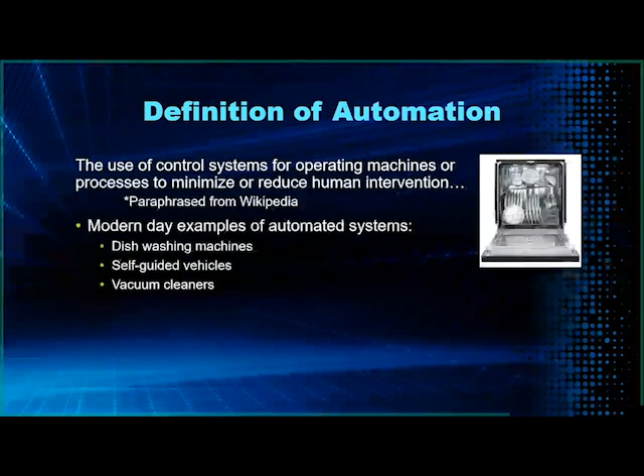So typically we think of automation as any task that is repetitive and a task that can be replaced with an automated device, whether it's a handling device or a software component. Some examples in our daily lives today could be the dishwasher, self-driving car, the automatic vacuum that runs around the house, scaring the pets and running down the stairs. So anyway, those are just some common examples to help you think about automation in a little different way.

So some of the trigger points that we commonly talk about relate to capacity, and this could mean trying to increase your current equipment utilization rate, also looking for ways to get more throughput through your system today without adding any additional resources.

We also want to discuss the importance of cost reduction. So this could be direct labor, it could be lost time, possibly relating to bad utilization or poor utilization of existing equipment. This could also relate pretty directly to quality enhancement, specifically having better process control, reducing scrap and waste.

Also very common in discussions over the last couple of years is the shortage of skilled labor. So how do we attack that specific element by using a little different approach? And also competitive positioning. So as you're quoting today, as you're marketing your business today, what are the salient points of your business? We want to look at automation relating to your ability to compete in the marketplace today.

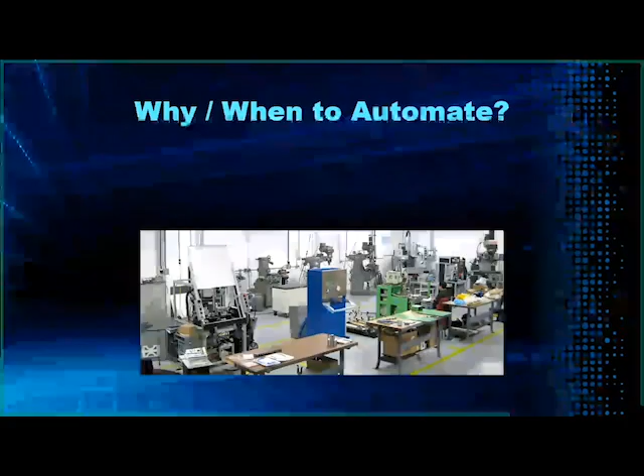So another thing that we like to look at when we're visiting with clients is we want to help them think about how they utilize their floor space today. It's a very, very valuable commodity that you possess - your shop floor, your capital equipment, your people. So are you using that space effectively today? How many machines currently sit idle during a shift?

Many of you recognize this particular picture as a traditional shop. This is similar to one that I grew up in. So you had a lot of machines sitting around waiting for an operator to bring work to it. So this is not too common anymore, but something that's interesting to look back at.

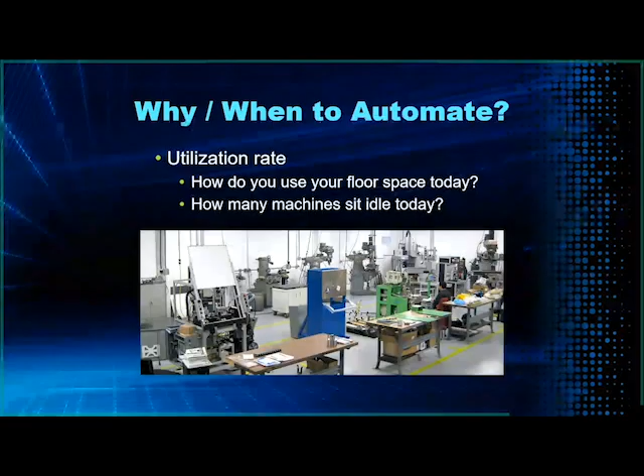How do you apply your labor today? It's not common, especially in North America, Canada, Mexico, to have an operator for every machine. We typically cannot bear that type of operator cost per machine. This isn't a typical model, but it's an example that triggers the thought: how am I utilizing my labor today?

We like to examine utilization rate and look at the percentage of time the machine is in cut compared to when it's not. You can break the non-cut time down by two factors: in cycle, where it may be traveling from one part to the next or to a tool change position and back, or the machine sitting waiting for work, or an operator setting a part up using the machine spindle.

So we want to look a little more carefully at why our utilization rate is not at 80, 85% or more.

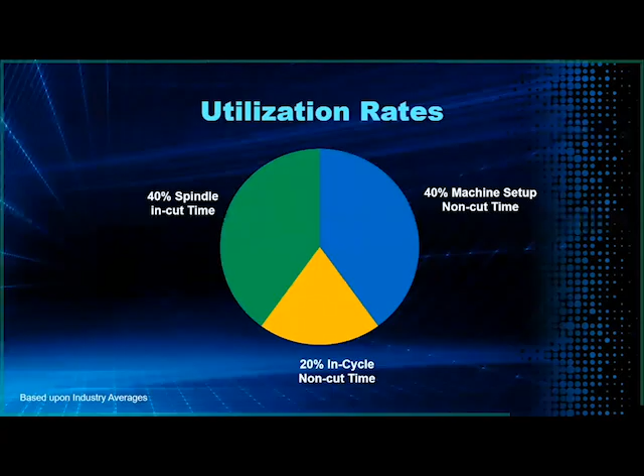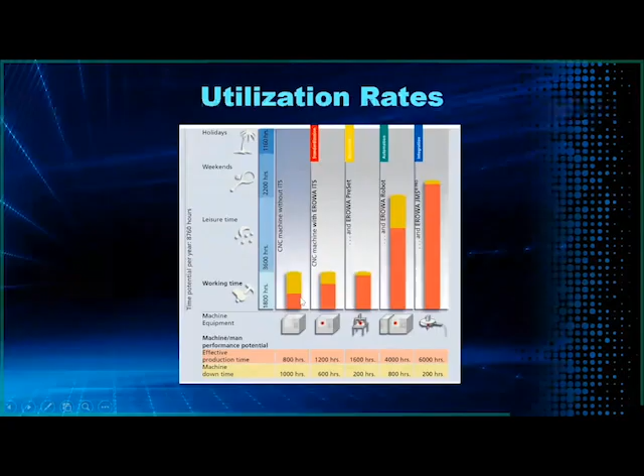When we look across this simple chart, we want to share with you, starting in the left-hand column: this is a traditional standalone machine set up by an operator without any zero-point tooling system. This machine requires an operator to bring the part to a vise or clamp to the table, then probe the part and tram it to find the reference or datums for that particular part. The effective production time in this example, annually, is about 800 hours.

Assuming we don't have a 20-30 hour runtime after the part is set up, this gives us a downtime of about 1,000 hours for this machine.

Now, as we move to the right, the only change is that we've added a zero-point tooling system that allows for quicker part setup, quick in and out. The operator doesn't spend any time referencing, aligning, or tramming the part relative to the machine spindle. So we're able to gain about 50% more than just having a machine without integrated tooling.

The next step to the right is adding a capability to preset offline, meaning I no longer have to find my reference on the machine. My machine can be used for cutting only; I don't have to use it for picking up the part. I have integrated tooling, I know where my zero point is, I can pick it up offline, transfer that information and the part to the machine, and I already have that information established.

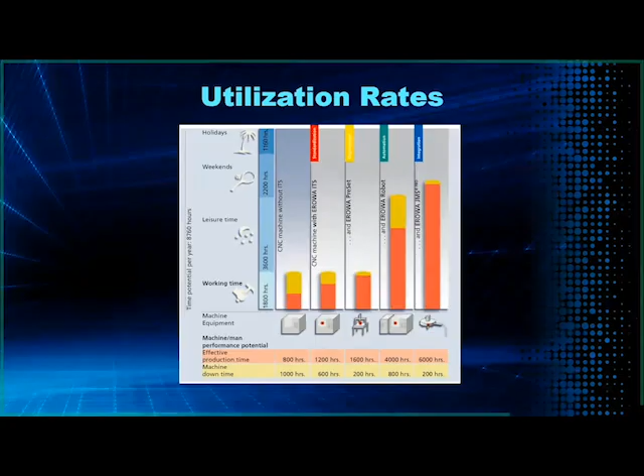So I'm going to share some examples that we commonly sell to clients and install in the marketplace today. Starting out, I want to help everyone identify and think about the standalone machine - a standalone machine with CNC control, some automation options such as a tool changer, and some control options to give you unattended operation.

Then we step forward into a single machine or multiple machine cell being tended by maybe a pallet changer or a part changer. And then our next example...

...is going to be a complex cell where we have multiple machines with different types of machining technologies and disciplines, such as grinding, milling, EDM, in a mixed environment. These are commonly set up in a linear track arrangement for the automation, for simplicity of placing the equipment on the floor.

We typically would have presetting involved in this type of cell, some type of material load-in and load-out station. We may or may not have a CMM for in-process quality measurement, and if we do, we'd have some requirement for parts washing and drying before inspection. And of course, with multiple machines in a higher complexity cell, we need some centralized management.

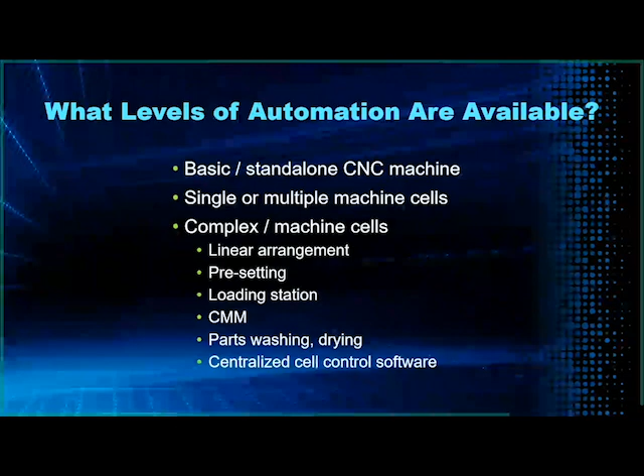So I'm going to share with you two common interface types that we will typically install. The first type is very, very simple.

This can be likened to a machine with a tool changer, because in this case, the machine is the master. So all of our programming, M codes, all the commands would come from the machine control. And then the robot or the pallet changer would simply be the slave to the machine control. So this is what we call type 1, where we don't have a cell controller.

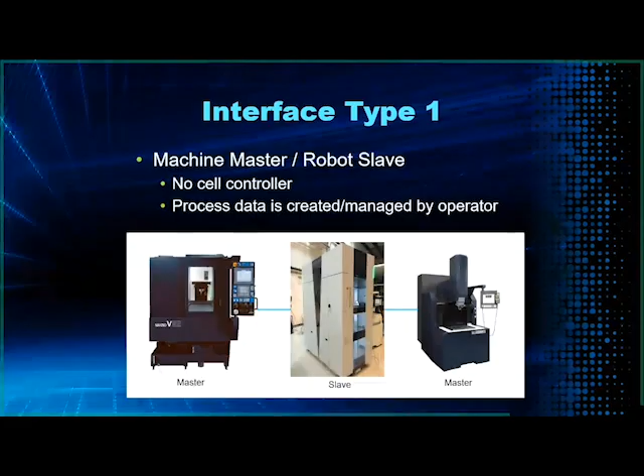All of your process data is created and managed by the operator through the machine controller. So some examples of this type 1 are a single standalone machine with a pallet changer, or call it a robot if you want.

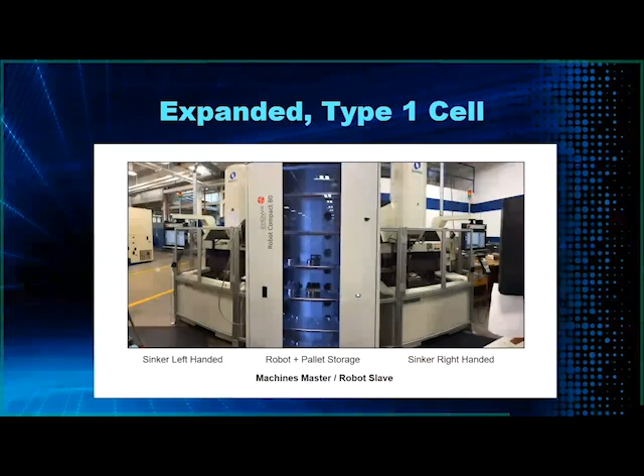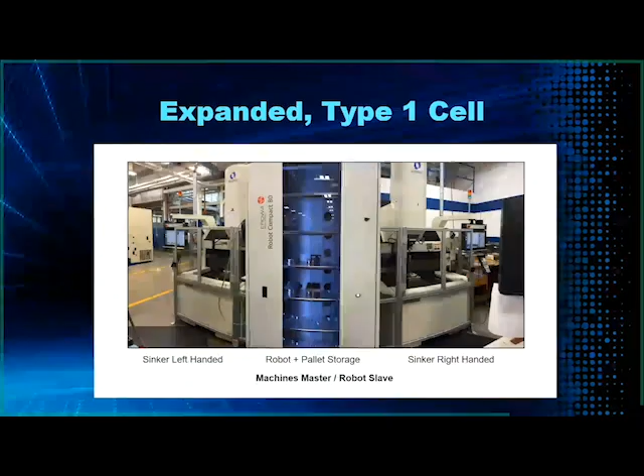Then we can also accommodate multiple machines with the type 1 that share the same robot. So in this case, you have to be a little bit more careful about how you isolate your storage magazine for each individual machine, because it's a little bit difficult to manage a mixed carousel if you're sharing it with multiple machines. So without a cell controller, this can be done, but it's a little bit more difficult, and the operator has to be on his toes when he's making the programs.

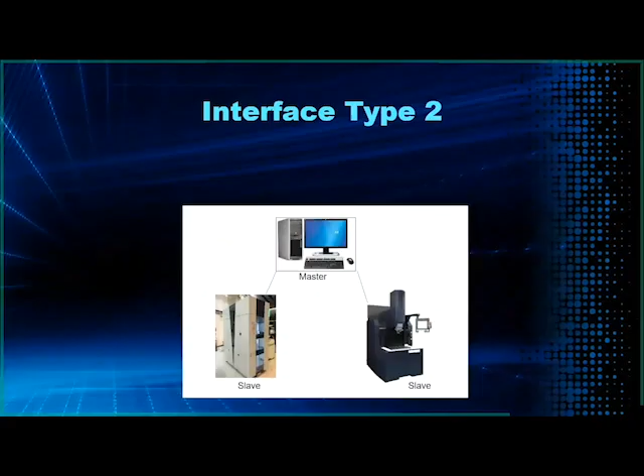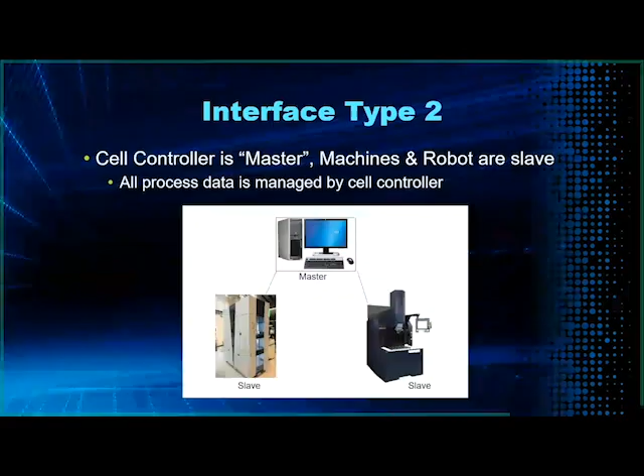So the next style is what we call type 2, where we have a cell controller at the higher level of the configuration. In this case, the cell controller becomes the master of all the equipment in the cell. Your robot and your machine or machines become the slave, and all of your process data is now managed and coordinated through the cell controller.

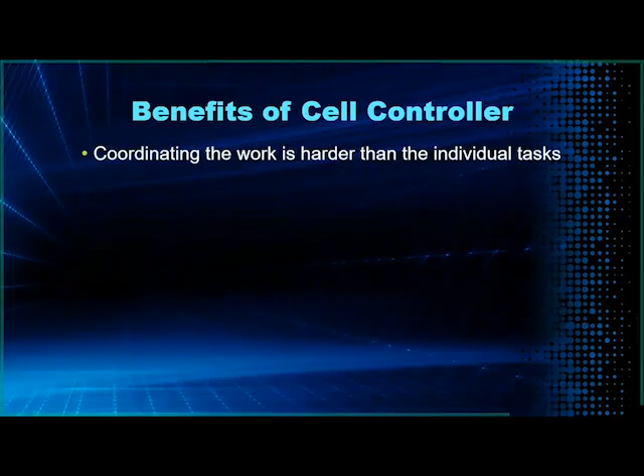The benefits of this configuration allow for better coordination where we have more complex tasks and decisions to make. A cell controller has a much better capability to organize all the data that's required, so the operator's not scrambling around making sure all the data, pallet numbers, and NC program numbers are coordinated. All of that worry is taken off the operator's shoulders with a cell controller.

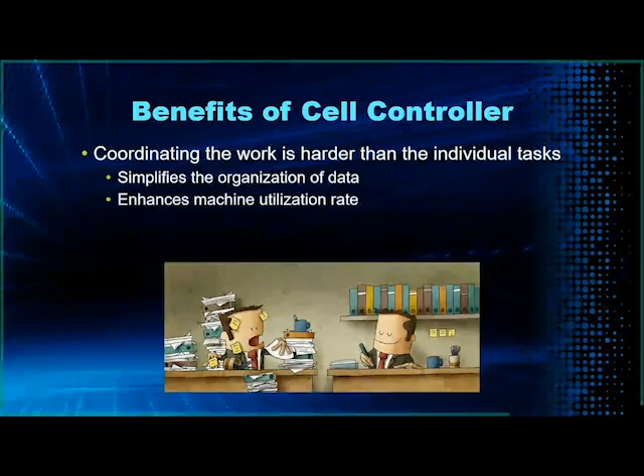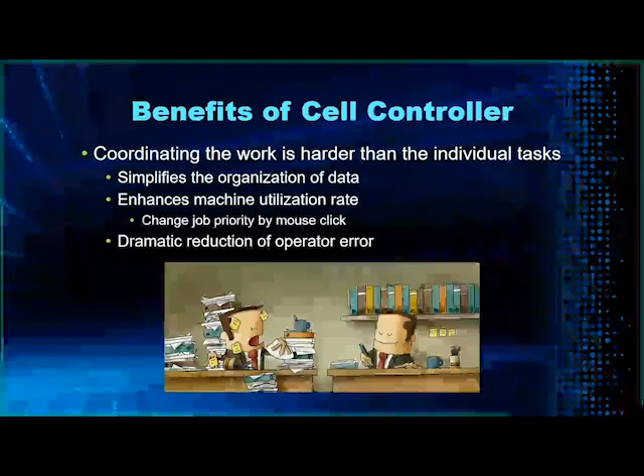So the primary point: it simplifies his task, enhances the machine uptime, allows for a quick change of priority throughout the day, and provides for a dramatic reduction in operator error, especially as things get more busy and he has to manage more data.

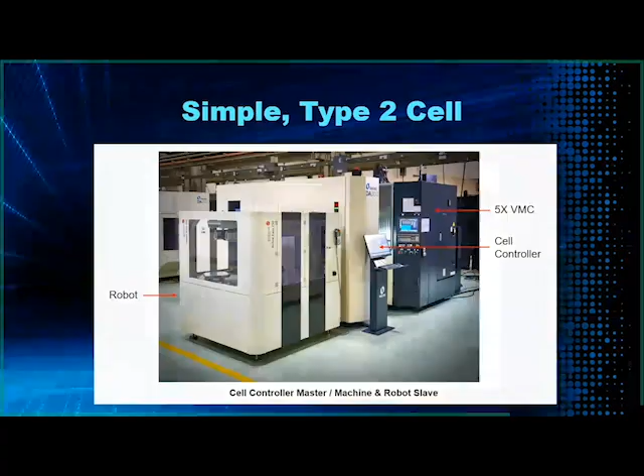And these can expand as large as you want. We have some installations here in the States that are up to 30 meters long with 9 or 10 machines. So this is an expanded type 2 cell with a linear track layout.

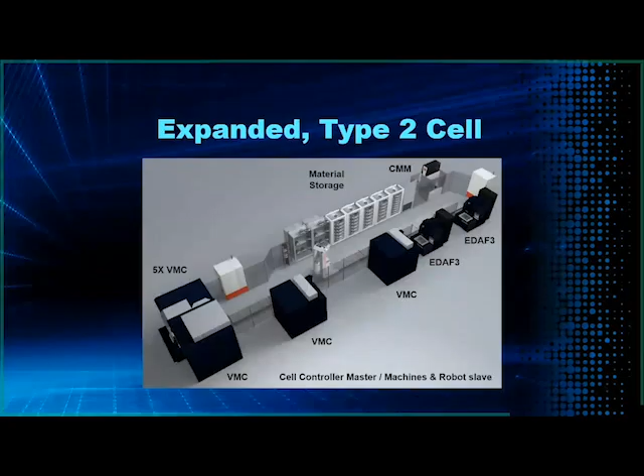So how do we get there? We've given you a couple of examples, some scenarios, different machine layouts. But really the question today for you is: you know where your shop is at today, you know where your people are at, you know your capabilities. So what we want to do is help paint a more detailed step-by-step example of how you might consider getting to your goal.

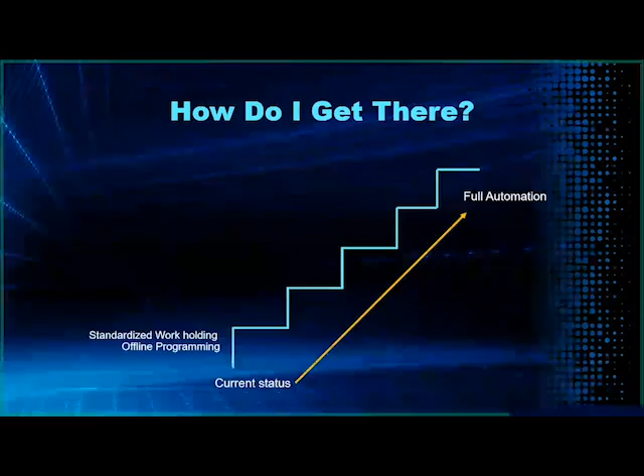So we think about the starting point of this chart as where we're at today. The last step, your destination, may be full automation, meaning you've got a full vehicle transfer system, maybe with a complex cell controller, or your destination could be anywhere along this stair step. I want to step you through this because we feel the first step really needs to be focused around standardizing your work holding and also looking at how you execute your offline programming today, because these are important components in eventually reaching full automation.

So the next step we typically recommend is a closer examination of how you're optimizing your existing equipment. For example, are you fully taking advantage of your tool changers and all your sister tooling functions? Are you using all the control functions that allow you to walk away from the machine and run it reliably?

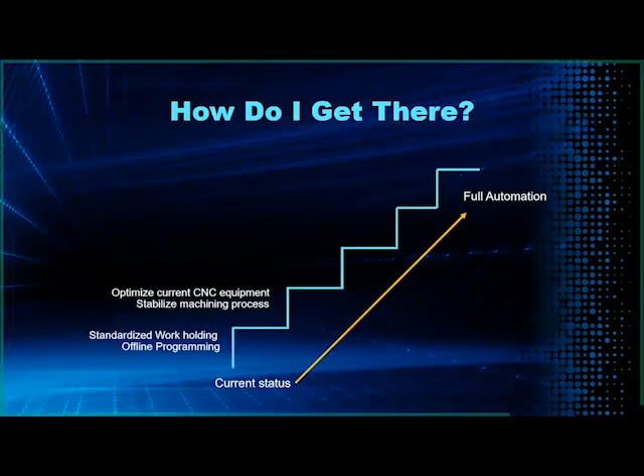And a very important point is, have you stabilized your machining process? Meaning that you can repeat the same process over and over, or run the first part successfully without a failure and meet your target tolerances and your other objectives. So that's standardization, or stabilization, of the process.

The next step is we really want the customer to audit their current machine utilization and also their current cost structure. So are you efficient at given steps along this process? So audit your utilization rate.

Also look at whether or not you're getting unmanned machining capabilities, and are you successfully able to manufacture a part without failure? Do you know where your tool life thresholds are at? Are you achieving unmanned capabilities in a reasonably efficient manner or not?

The next step is looking at your standardization of any of your processes that are involved in manufacturing your part or your end product. So do you have practices and standards in how you execute each step of that? Are you able to set up your parts and your tools completely offline? That is another important step to embrace and to get good at before you move along to the next step.

And again, keep in mind, we have not even talked about automation yet. We're just getting the fundamental steps in line before we move to automated material transfer, and then finally automated data transfer and data management. So this is a stair step that we challenge each of you to look at and think about where you're at along this curve.

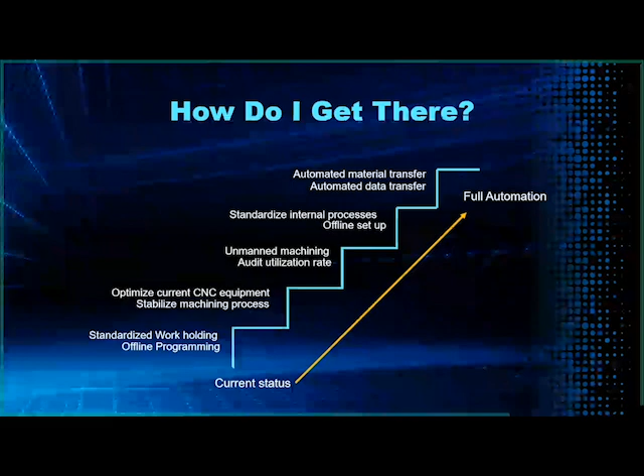So also the importance of your process. Our process basically is how we do something, how we properly execute each task along the way to reach a successful result. And also what's important is that your process excludes the wrong way to do something. So that's part of the learning.

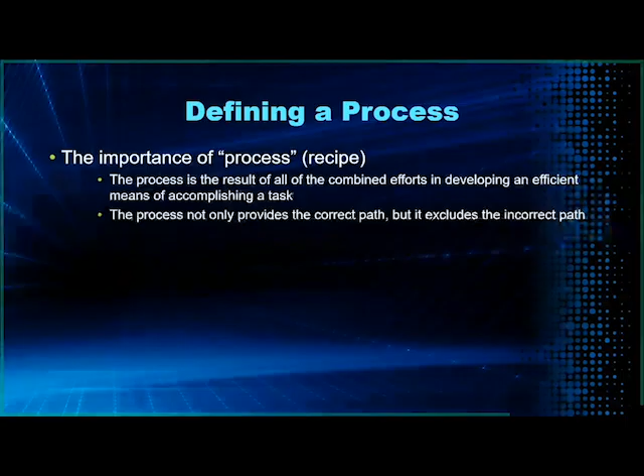But if we document and learn properly, we are able to have a way to do something. So I think about this as cooking, a recipe book. I like to know that when my wife or myself makes a dish, it's going to taste reasonably good. So a recipe or a process is nice to have.

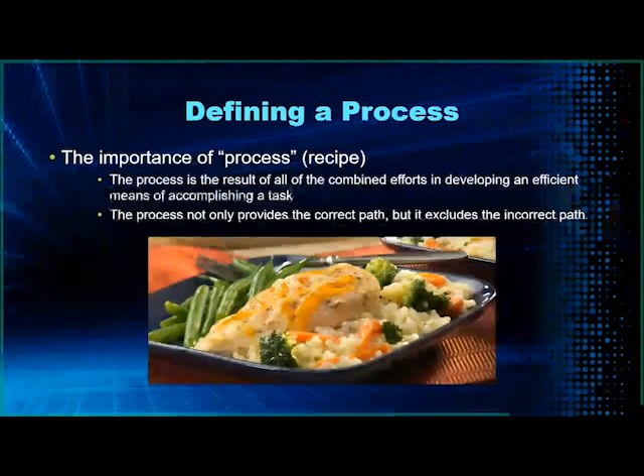So the documentation of your process step is important because it allows your people with the experience, the learned experience, to not only teach someone else, but also document and have some procedure that you can pass along so that when you repeat this task again, it's going to be efficient. You don't have to repeat and try the things that didn't work the last time. So this is helpful for training, for traceability of your manufacturing.

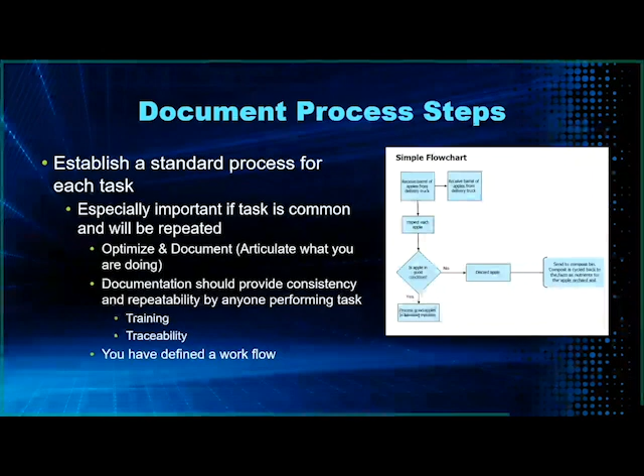And very importantly is we want to have a defined workflow. So your flow chart or your workflow can just be simple as 5, 6, 7 steps that you take each time to perform a task. So this is nice because once you have your process flow chart, you can teach someone, you can document, and even when you get into full automation, you can actually integrate that into software logic.

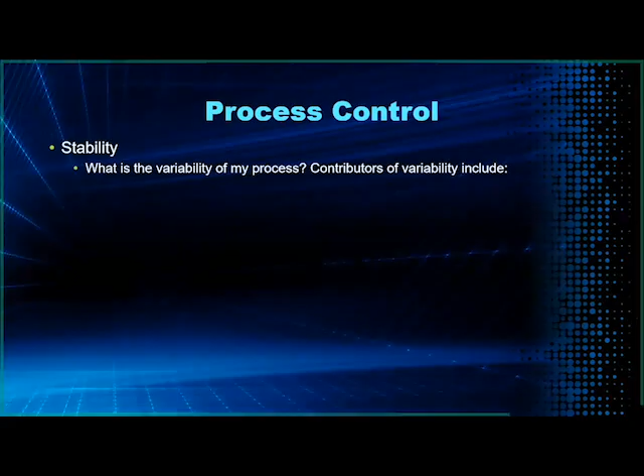So your process controls involve your stability of your process. So your variability, and your variability comes from many different things, such as your shop temperature, your machine tool, your tooling and your tool deflection, your machining process, and also how you inspect and what's the uncertainty of your inspection process.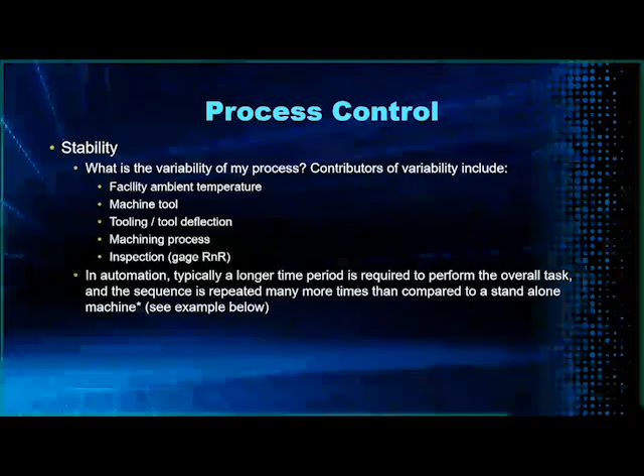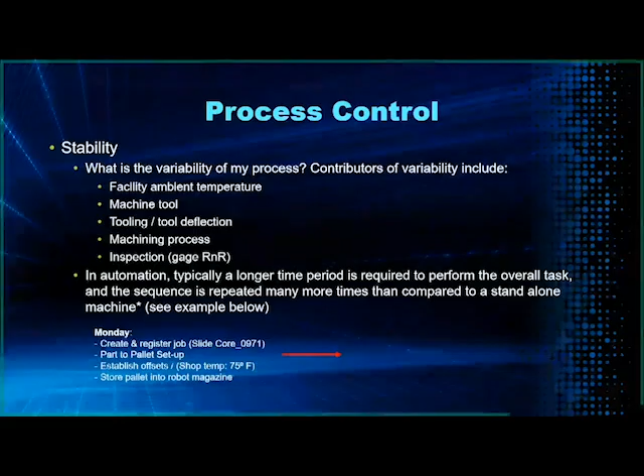So also I want to help everybody think real briefly about in automation, you typically need a longer time before you set up from when you set up a part to when you machine it. So if you set up a part on Monday and you machine it on Thursday or Friday, you need to know how much your temperature has changed from the time you initially basically got your datums for your part that might be set up on a pallet.

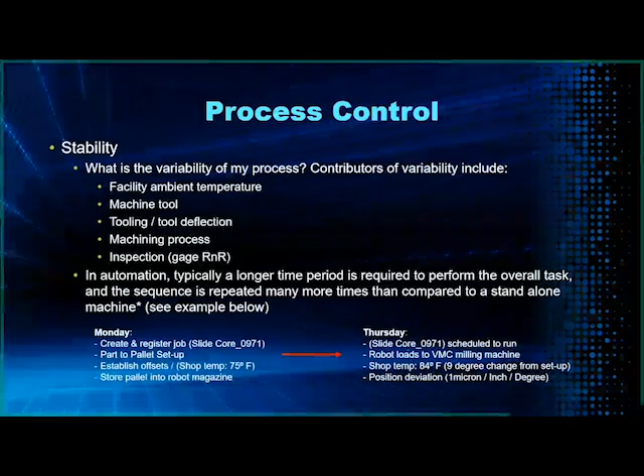So also we have to understand predictability. So can you hit your target the first time? Because in a die and mold shop or an environment, we don't have a drawer full of 100 parts to practice on. So you have to have a reasonably good idea of your predictability.

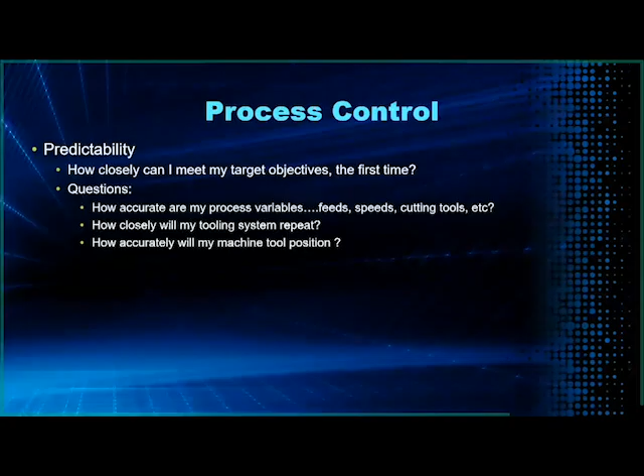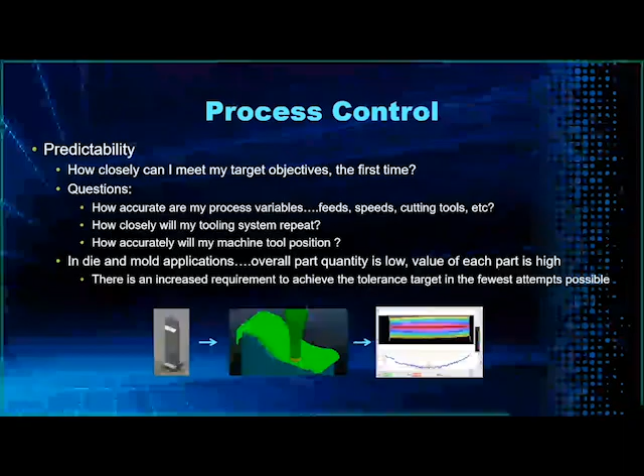So what I like to think about is your solid model is the perfect digital scenario. And as you pass that digital model through your shop, how much variation from your digital model are you going to get through your machining process, through your inspection, and all the other steps? So you want to understand your predictability. So can I hit my target the first time or the fewest number of times possible? Because now my parts are high value and I have a low quantity.

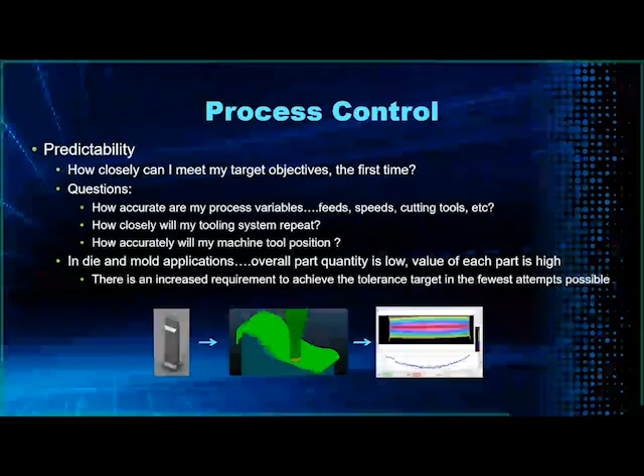And then the last thing I'd like to think about is what is your repeatability relative to your accuracy? So we think about your machine tool stability, your process stability, and your measurement technique.

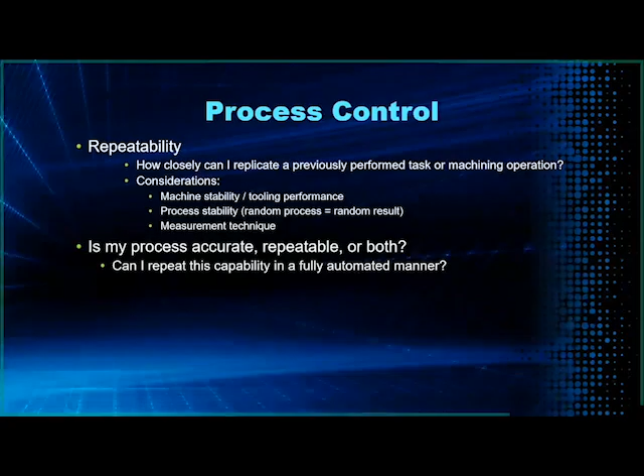Capability is really important when you're building or planning an automation environment, because you need to understand how much contribution each element will have to your final tolerance.

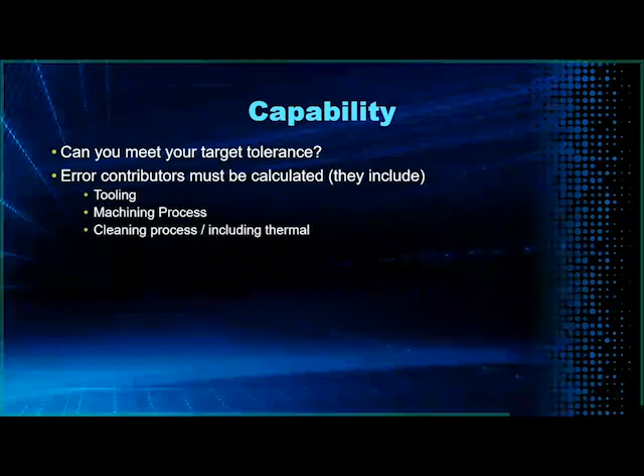We like to think about your contributors again from your tooling, your machine process, your cleaning, if it has some thermal additions to your part, how much change is happening in your facility.

And then what we do with this information is we like to create a stack up or an error budget to make sure that, hey, if I'm going to have a mill, an EDM, and some other elements within the cell, how much error stack up am I going to get?

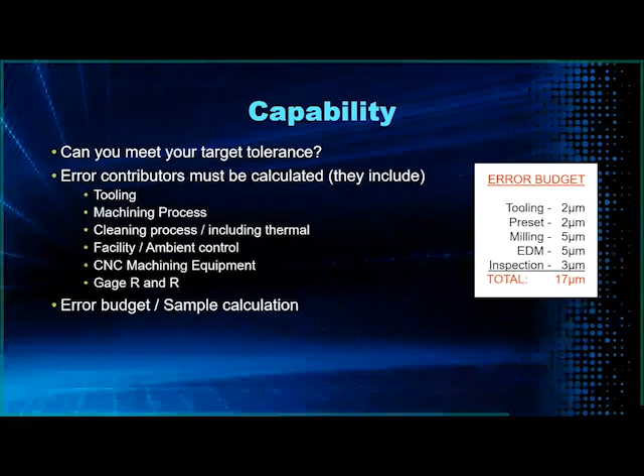So we want to make a calculation around your tooling preset errors, your milling machine process error, and at the end of the day, what is your accumulated stack up? And if you need to get below this stack up, you need to think about what items do I need to take out of that equation to meet my tolerance requirements within my shop for these particular parts.

So practical capability, if you think about 10 microns or 4/10, just under a half a thou, that's reasonably challenging to reach in a fully automated approach. So you need to really look at these individual contributors pretty carefully when you're planning your automation cell.

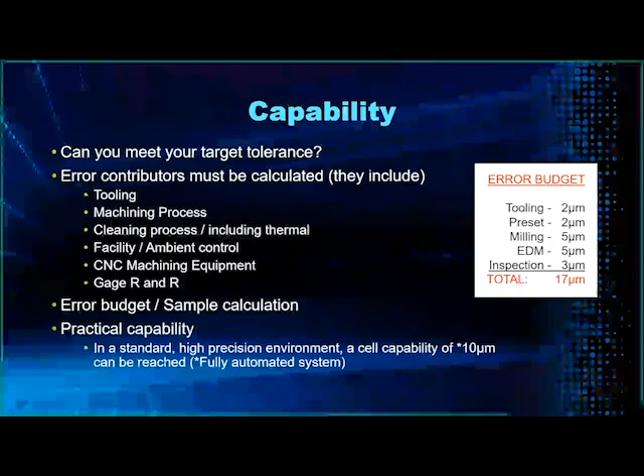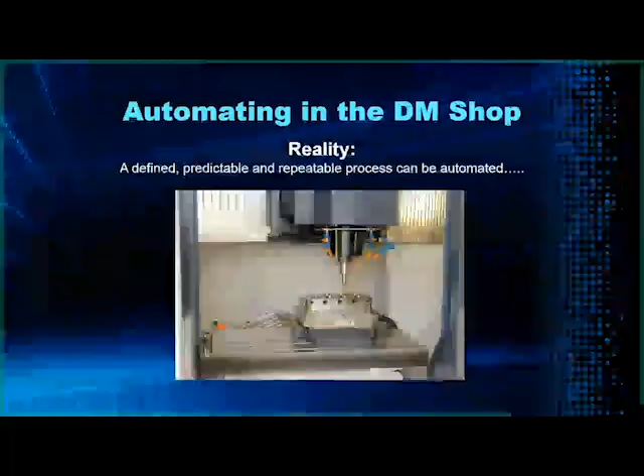So, automating in the die mold shop. A lot of people feel that this can't be done, that it's only for production. But if you think about the fact that if we have a defined, predictable, and repeatable process, then you can automate that process.

Typically in your shop, you want to start with defining your goals for your business. So whether you're targeting efficiency, delivery, utilization rate, cost, unattended machining, or quality enhancement, you need to determine what that is. And then communicate that to your team, and communicate this often.

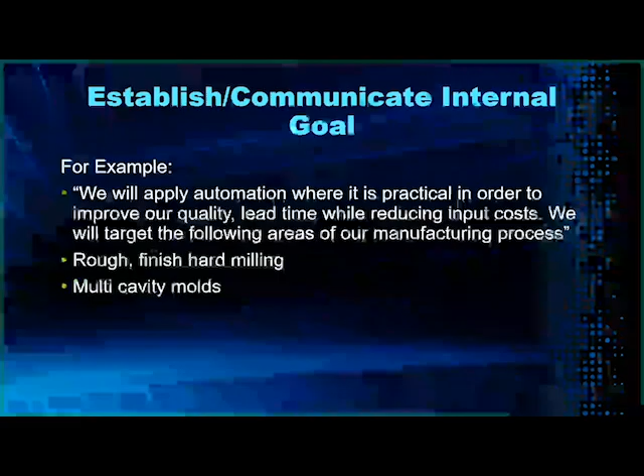You want to identify what your message is, what processes you're going to attack, and what machining elements you want to have involved.

And then what we look at is this from a company-wide perspective, because you want to have as many steps in your process involved with automation so that you can have a seamless transition from process to process.

So this includes starting with your material mounting schemes, starting at your design to include your pallet, your integrated pallets. You want to maximize your spindle time, faster setups, help that operator get to that start button as quickly as possible. That's really what we're trying to do, and then maximize or optimize the time that the machines are running. The machine tools have to be predictable and repeatable.

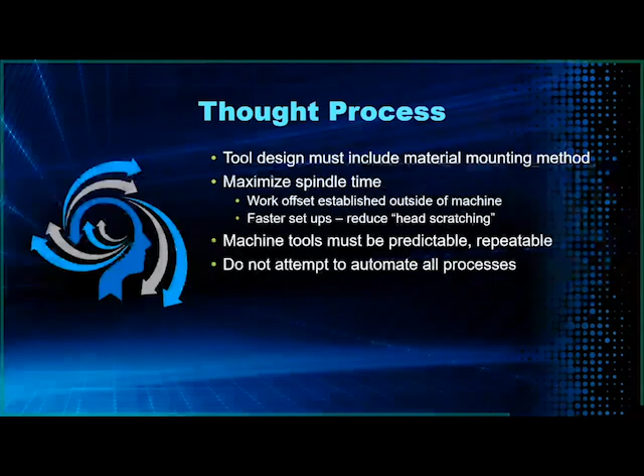Don't attempt to automate everything. And you have to understand your error budget and your stack up. Does that stack up fall under your error budget that's allowable?

And your employee communication to everyone in your organization, make sure you reinforce the message and the company vision that you laid out in the previous slide.

Maintain a solid supplier relationship, because you're going to need them when they start installing the equipment, integrating the automation, executing the application, and the automation process training. So the relationship and trust with your suppliers has to be sound and seamless at this point.

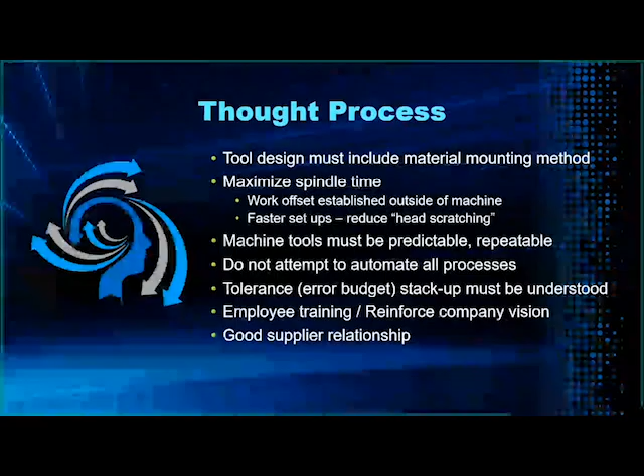So generally, we recommend starting small, manually automate first. That simply means start with your integrated tooling, manually transfer your parts in and out of the machine, start trusting the tooling, and automate your lowest risk operations first.

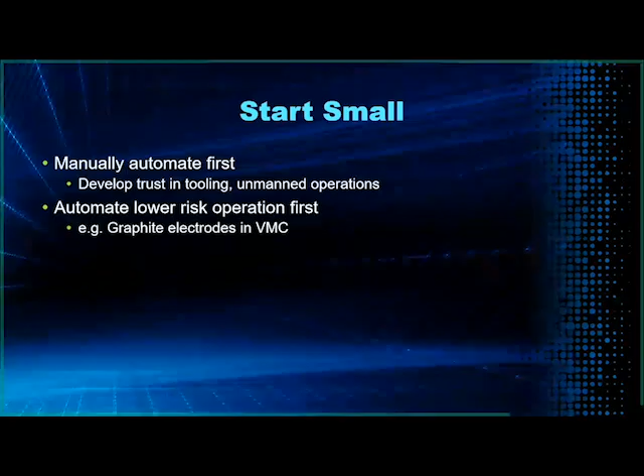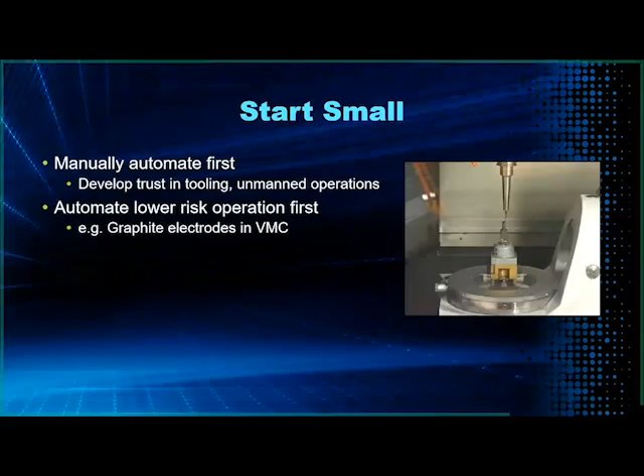Graphite electrodes are a great place to start. Lower risk, because if you break a tool, you break an electrode, and it's generally fairly inexpensive. But what you do here is get quantities, unattended time, and you're developing trust in the automation process. So start to experience the efficiencies of this at a smaller, lower risk scale.

Audit your machine utilization, and you start developing the mindset. You start to schedule accordingly, plan the work accordingly, and you also realize and accept that this is going to be different. You can also start exposing other people in the shop to what you're doing, and communicate those successes.

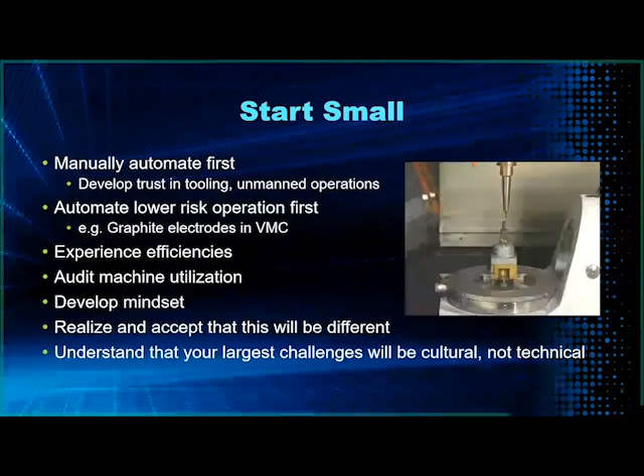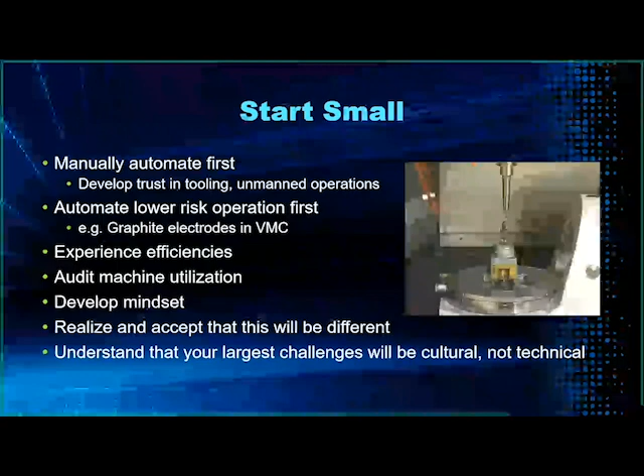Also, the last bullet point here is understand that the majority of your challenges are going to be cultural shift, cultural transition. The technical challenges, the technical obstacles typically have already been solved. The challenge here will be helping your staff and your company realize what it is, communicate where we're going, and help them along that stair-step transition we talked about earlier. Help them through each step of learning and gaining confidence and competence in each of those steps. But that last bullet point's important - please keep that cultural challenge in mind.

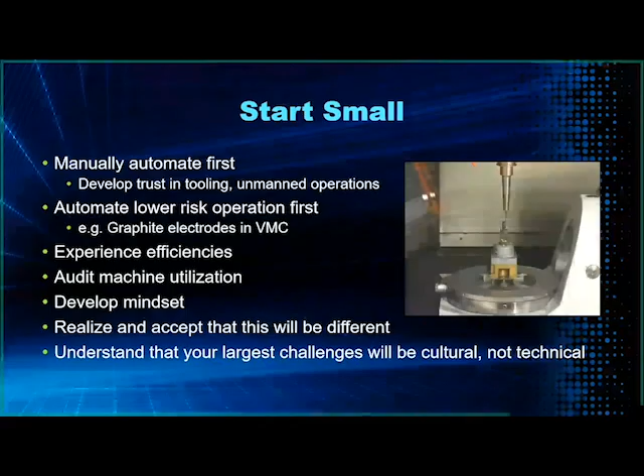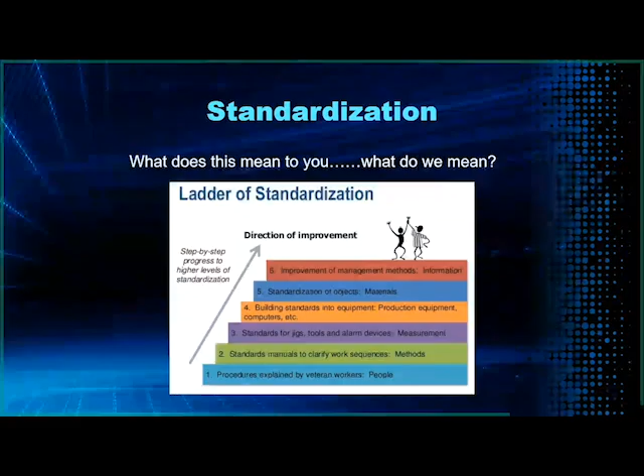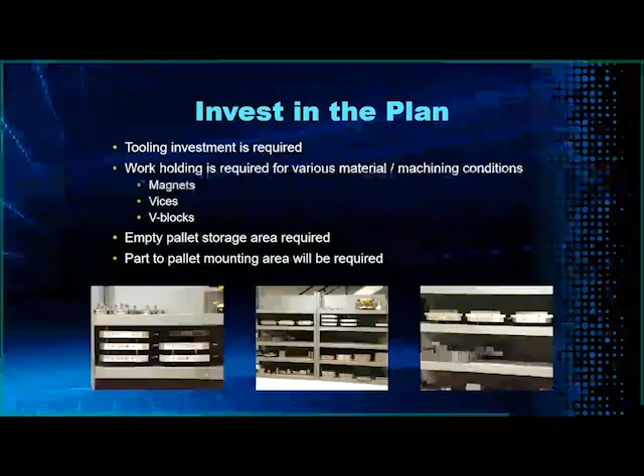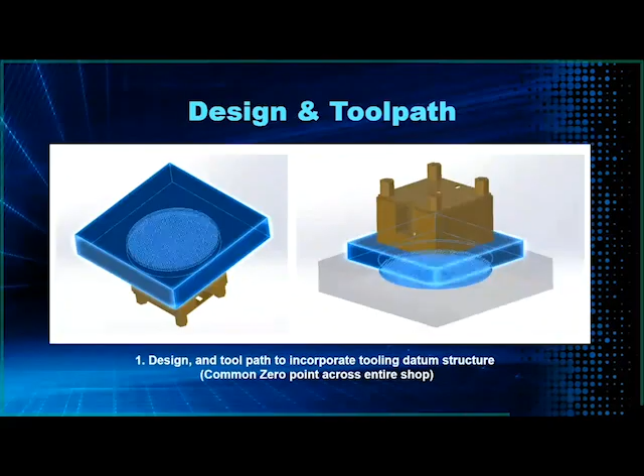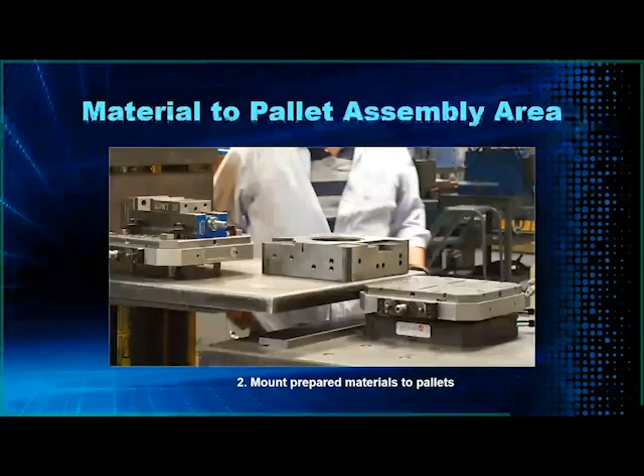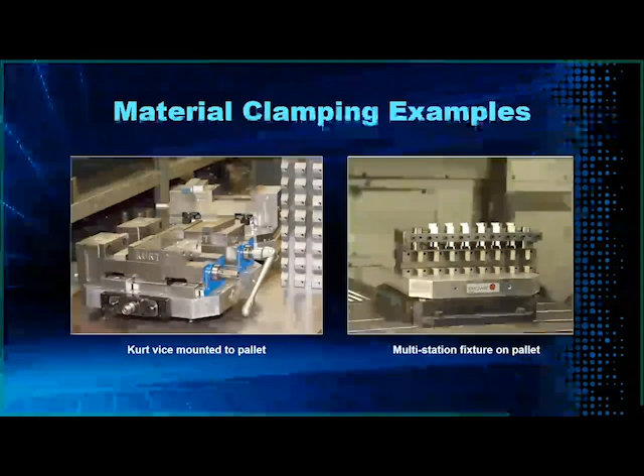The steps in a workflow start at the design and tool path phase. Again, my pallets in this case are part of the model, part of my design. Second step is having your materials prepared, mounted in a specific area in the shop designated for setup and pallet preparation. The third - these are just some examples of various fixtures that can be mounted to the pallets. We have conventional vices and multiple V-block fixtures mounted to the pallets that are going to be transferred into the machine.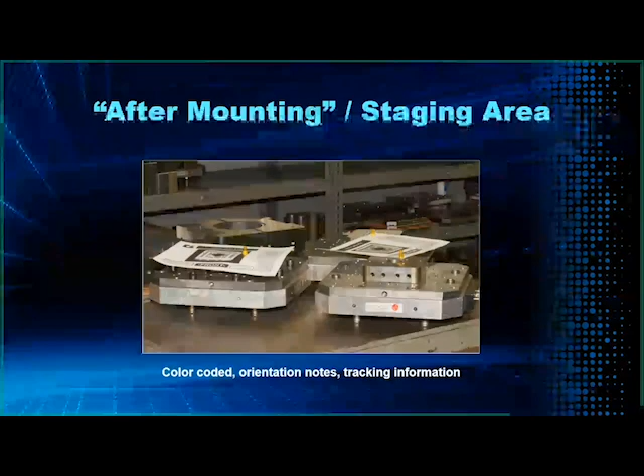We also have to think about how we're going to communicate across the different processes, steps from one area of the shop to the next. This particular company uses different colored marking pens, different types of tracking sheets, different communication tools on the tracking sheets to help communicate the status of the materials to the next people that are going to touch these parts. Third step is you're going to identify the pallets, and if these are traveling through the shop, you're going to have some type of an RFID tag that identifies this pallet and part relative to the manufacturing task. This is the registration step.

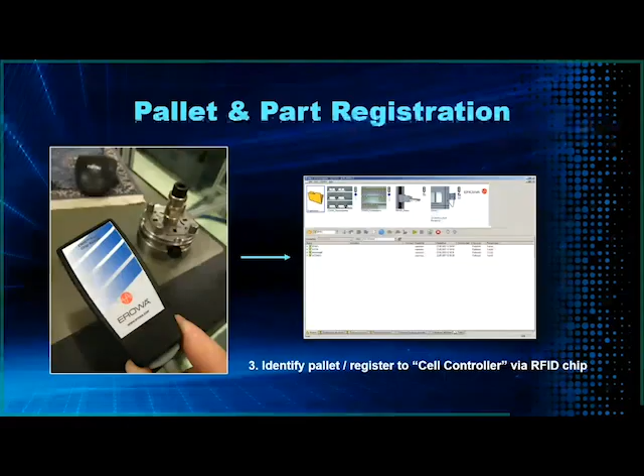Fourth step is these pallets will go to a designated setup area in the shop where all the offset information is obtained and then correlated to the RFID tag, which is stored in the cell controller unit for the automation. So again, fourth step, presetting. We're not using the machine tools for this - we're using a dedicated presetting system.

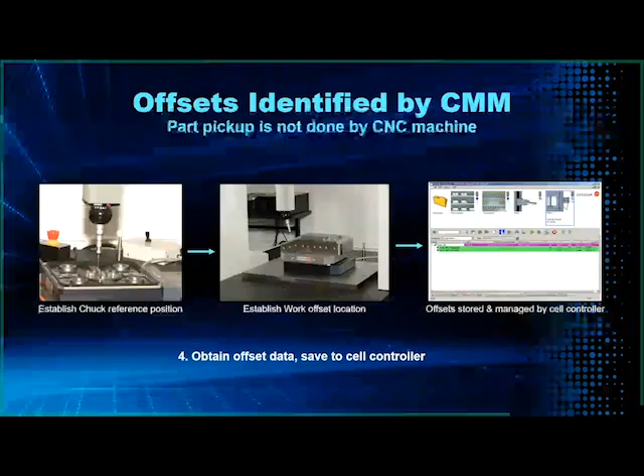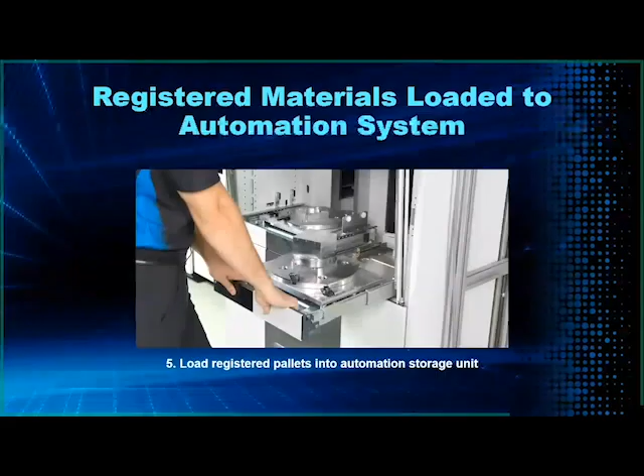And the fifth step is basically you take the pallets and the materials and load them into the automation storage unit. So your work, steps 1 through 5, is the same on every job, every part. Once loaded into the storage unit, you're ready to schedule the work. The automation system scans the pallets to make sure the cell controller knows where they're stored - they're tracked all the way through so they're not lost or confused with another job. You don't want to put the wrong part and pallet in for the wrong NC program.

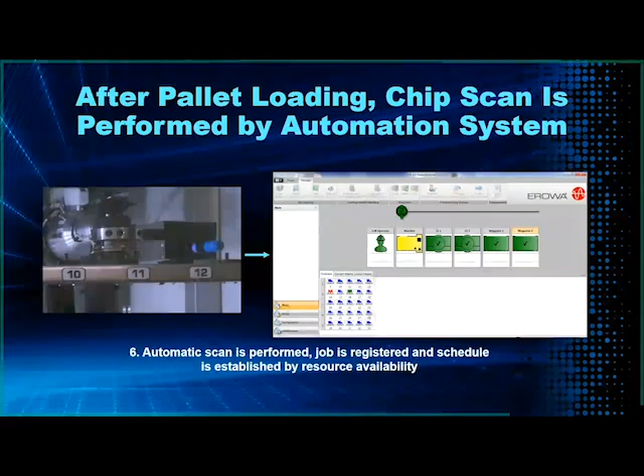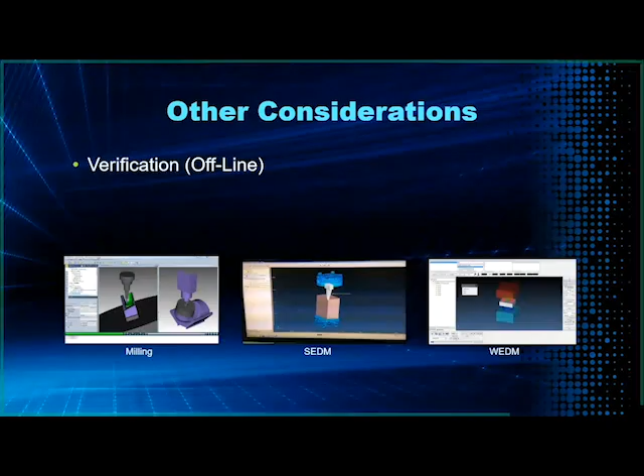So other considerations, as we're reaching the conclusion of the presentation - we are asking our staff members who are preparing, planning, and programming to work offline of the machines now with this new automation approach. So we have to give them all the offline tools to plan and simulate all the machining processes as effectively as possible offline. Whether this is milling, sinker EDM, or wire EDM, we want them to be able to simulate and visualize all the movements of tools, slugs, and potential collisions well in advance of that part ever making it to the machine. This not only protects the machines, but also makes sure our manufacturing process flow never stops.

So if we have job 1, let's say it stops running because of a collision Friday night, well that means jobs 2 through 10 don't run through the machine either if the machine has to stop. This is a really important part of keeping your part flow and manufacturing flow continuing through the machines - not just protecting the machines with visualization, but making sure we keep our manufacturing flow consistent.

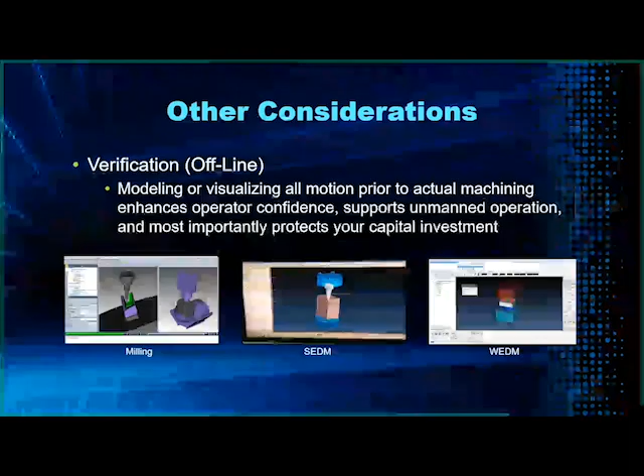If you are thinking about automating your wire EDM, you have to think a little deeper about your program strategy, how you're going to manage and hang your slugs, how you're going to process the slugs when operators are available. You also have to make sure you have a reliable automatic threading system so you're not missing threads. These are fundamentals to think about, even if you're not automatically transferring parts in and out of the machine.

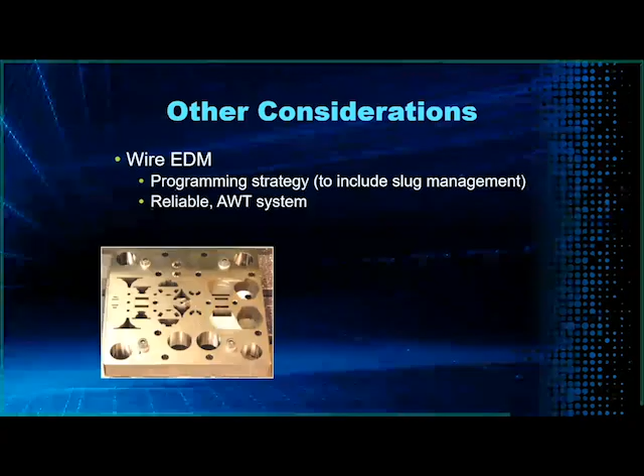You still have to do this in an unattended machine mode. We have to have a highly reliable and low maintenance guide system so that we're not stopping the machine every 30 to 40 hours to clean guides.

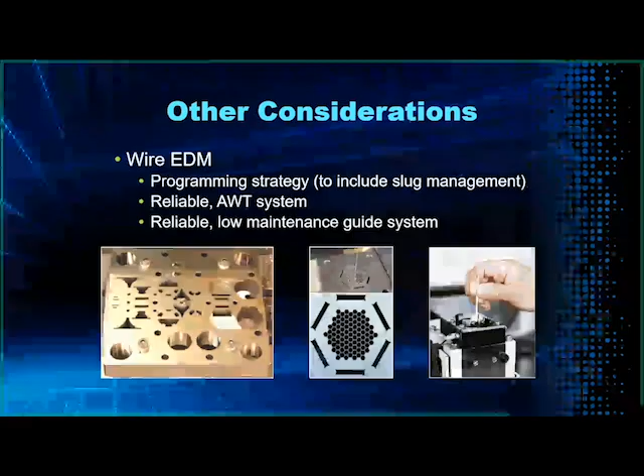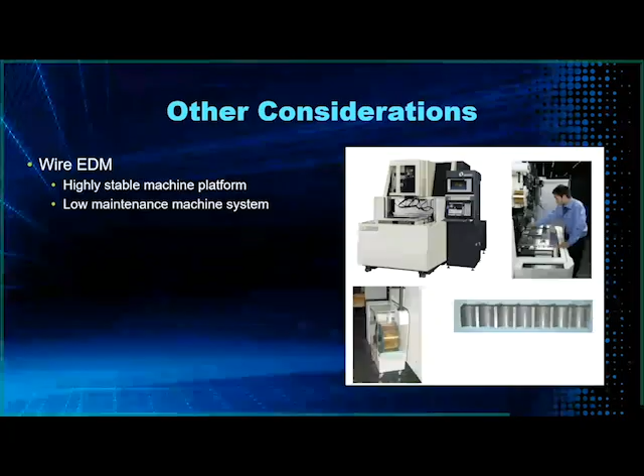As we start thinking about extended run times, we want to think about the stability of the machine platform over time—thermal drift, positioning accuracy, every aspect related to long machining times. Low maintenance overall machine system—that could be your lower arm seal plate, filtration, threaders.

You also have to think about your access to the machine zone, both by your operator and your automation system. Can both the operator and the automation system coexist in loading and accessing that table? You also need enough wire spool capacity to run through a weekend or overnight, and your energizer plates as well.

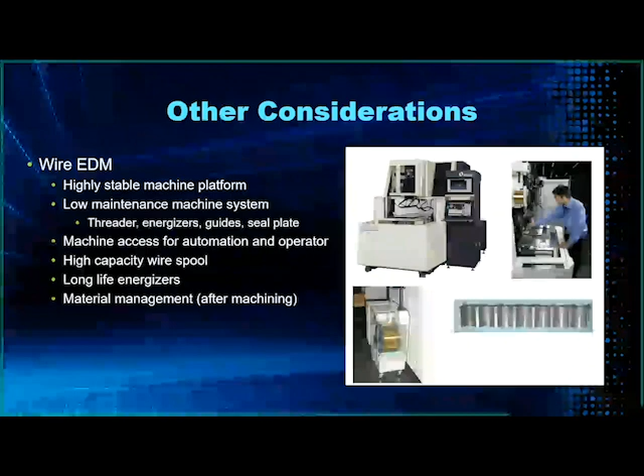Material management—this is something not often considered—how are you going to cut a part, take it out of the machine, and have it sit on a shelf without rusting or oxidizing after it comes out of the machine? So you have to think about how you're going to manage your material after it's been cut.

In summary, to compete in today's environment, we believe automation—and effective automation—is imperative. We also want to encourage you to engage with your suppliers. Look for a credible, knowledgeable, experienced supplier that has knowledge and experience in integrating and planning automation systems.

We believe, through our experience, that Makino has been consistently involved in automation systems in the die and mold production environments since the late 1980s. We have a vast amount of experience in not only what works, but also what doesn't work. So we're able to help guide clients through potential pitfalls and advise on areas that will and will not work effectively as you consider automation investments.

Again, we believe that automation, if properly planned, is low risk. We also want to remind you that not all tasks should be or should attempt to be automated. It's not cost effective in some cases.

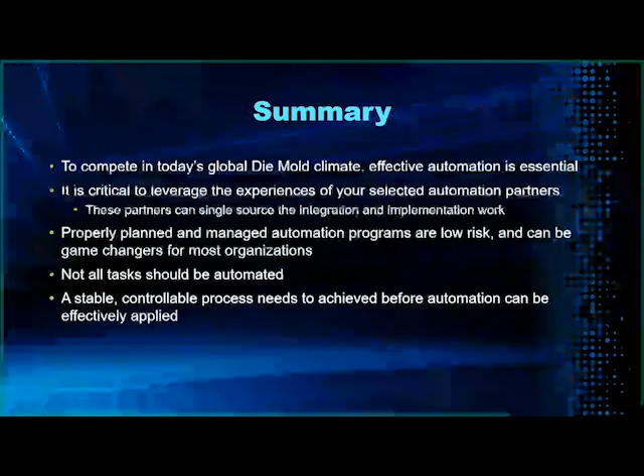We also want to remind the audience today that a stable and controllable process must first be achieved before we go too far down the path of automating a task or process. So the first step is having process control. We believe the time is now.